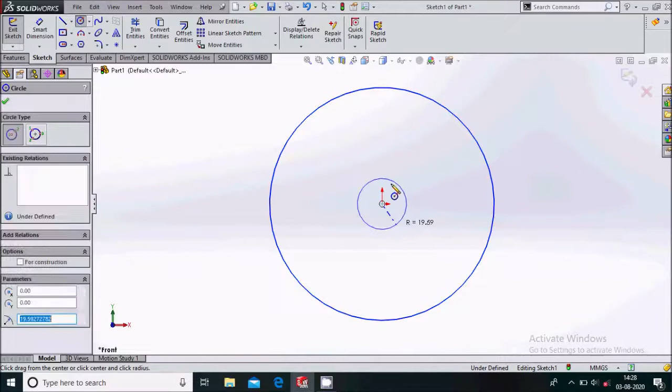So go to File, New, Part, OK. So here we'll first draw the bigger pulley. For that select the front plane, sketch on it, draw a center rectangle, draw a circle. OK. In this way we will smart dimension the circle to be 250 mm, this to be 50 mm, this to be 20 mm.

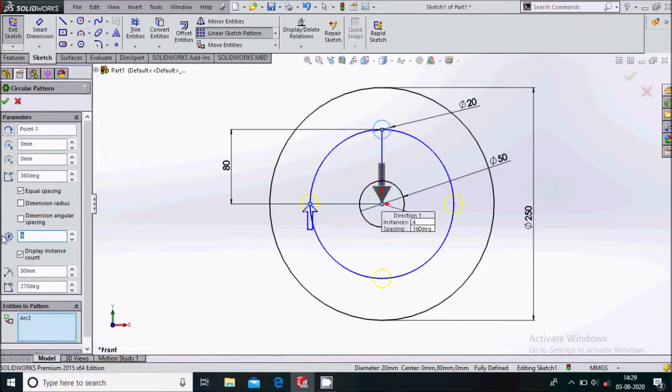We'll give the dimension distance between these. So the distance will be 80 mm. OK. Before selecting this circle, make these 2 points vertical. Now select the circle, go to the circular sketch pattern and we'll create 4 such circles. Now go to the feature Extruded Boss/Base. We'll extrude it by 50 mm. Say OK.

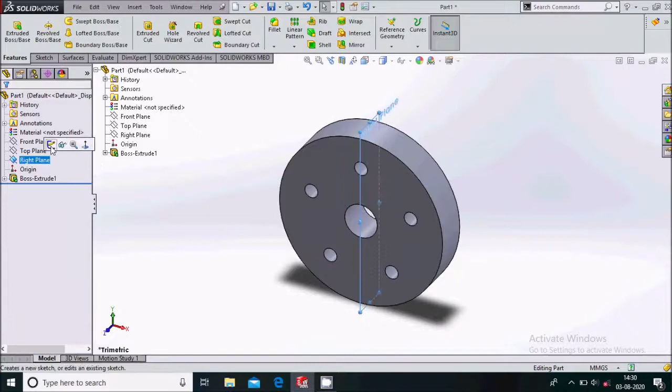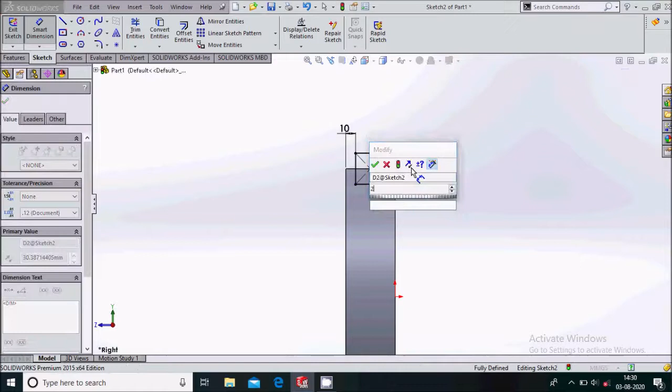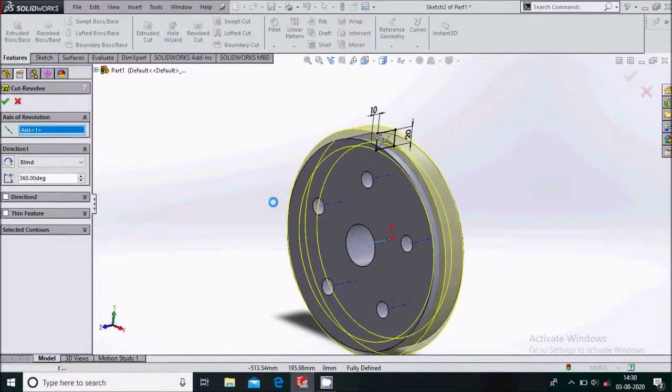Now here we'll select the right plane, sketch on it, make it normal to. We'll draw one center rectangle over here. We'll give the distance between this and this to be 10 mm. Then this total will be 20. OK. Now go to the revolve cut and here we'll simply click on axes. So you can see the axes are visible over here. Simply select the axis of revolution, this, and say OK. So the material will be removed about this. So simply hide this.

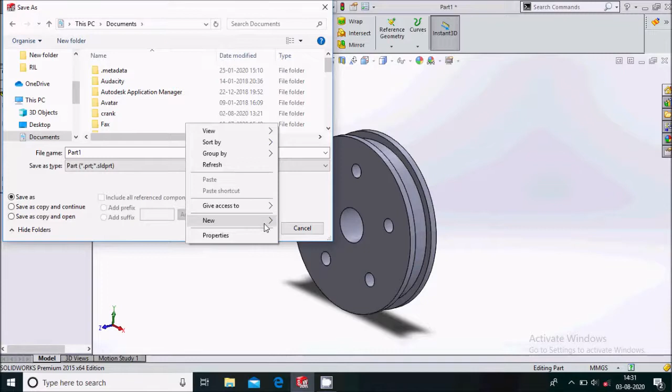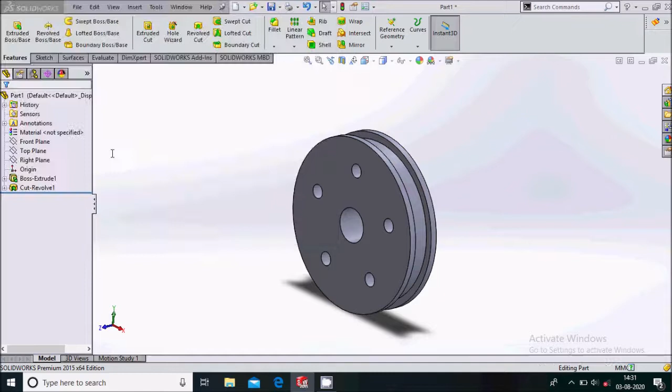Now Ctrl+S to save this in a new folder. We'll create a new folder, name it flat belt drive, simply open this and we'll name it as pulley 1. OK. So simply close this, go to File, New, Part, OK.

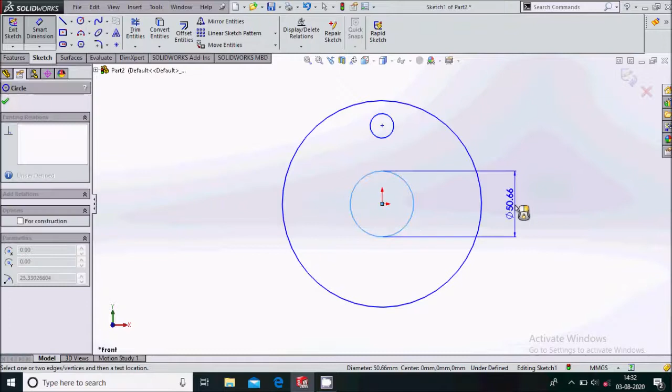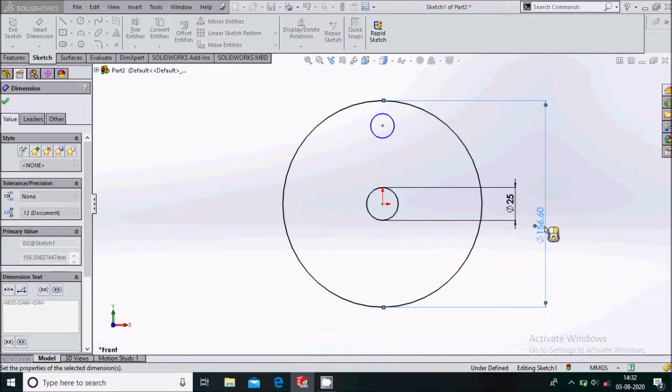We'll draw over here the smaller pulley. So front plane, sketch on this, draw the circles. Smart dimension them. We'll give the dimension for this to be 25 mm. We'll give dimension to this to be 125. We'll give the dimension to this to be 20 mm. And we'll define the distance between these to be 40 mm.

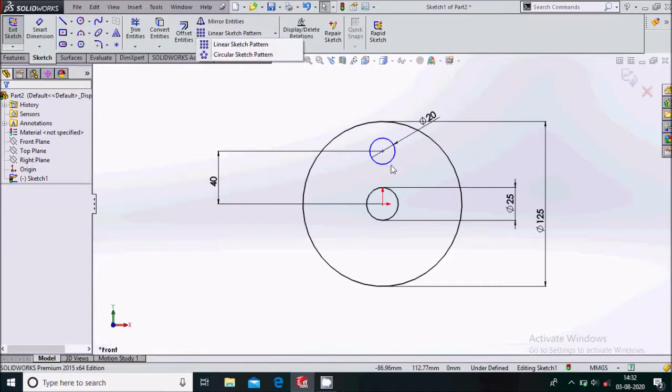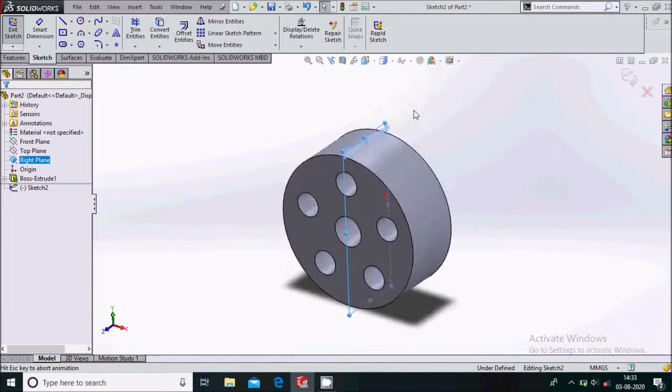Now we'll select this and use circular sketch pattern, we'll pattern 5 number, say OK, go to the feature Extruded Boss/Base, we'll extrude it again by 50 mm, say OK. Now we will select the right plane, sketch on this, make it normal. Again we will draw one center rectangle. Smart dimension this from here to here, 10 mm. This distance to be 20.

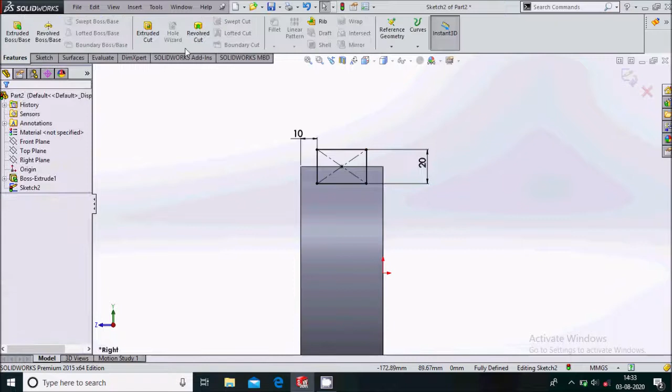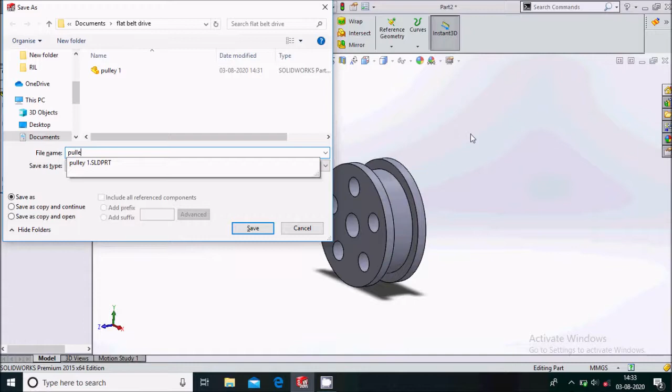OK. Go to feature, revolve cut. Again we will make the axis visible. Simply select the axis of revolution to be this one. So it will cut the material. I will hide this and save it with Ctrl+S as pulley 2. Now we will move on to the assembly of this.

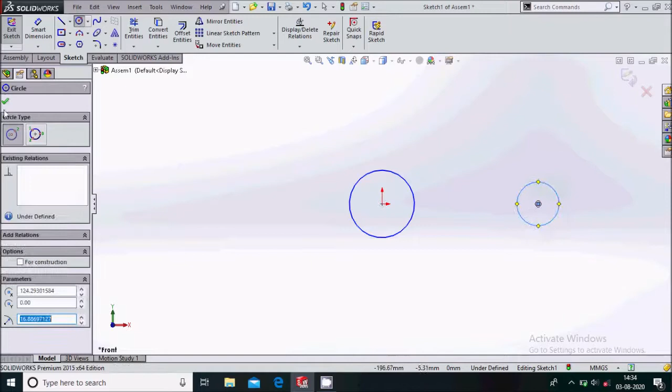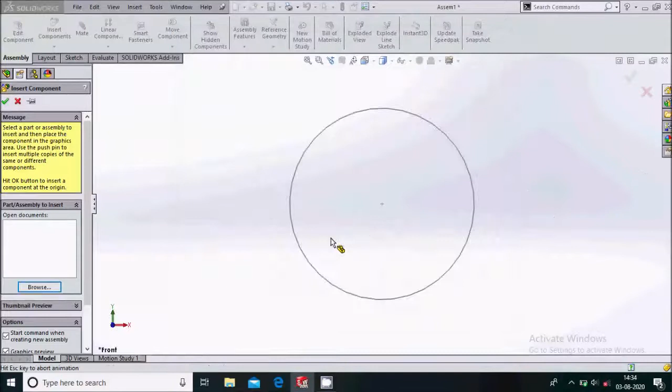So new assembly. OK. Cancel this begin assembly, select front plane, sketch on it, draw the 2 circles over here. And define the dimension between these to be 500. Simply exit the sketch. Now we'll go to insert component, browse. We'll insert these 2 pulleys, first and then second. Now this will be fixed, so right click, make it float.

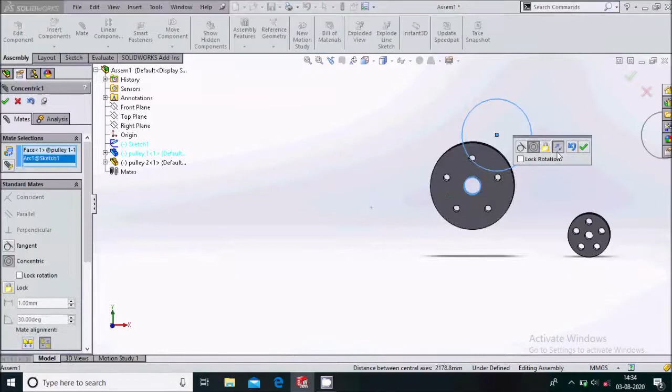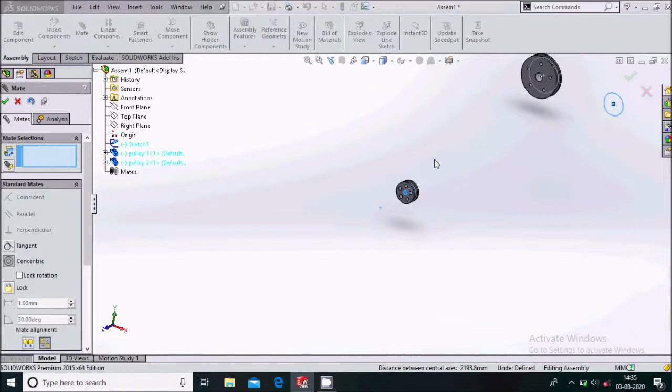Now we'll go to the mate, select this inside face and this circle, make a concentric relation. Now we will select the front plane and the back face of this, coincident mate. Again select the inside face of this and this circle, concentric mate. Select this face and this face, coincident mate. OK. Make it normal to. Now we'll just hide this one.

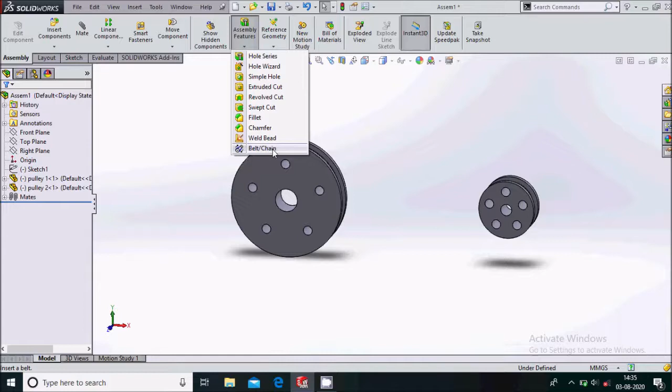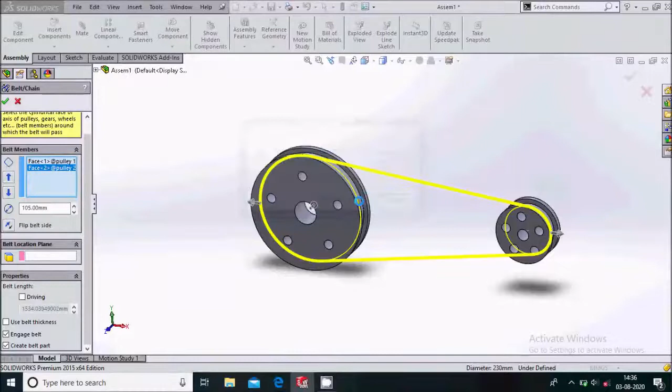So we'll go to the new feature in Assembly. Here in assembly feature you can find belt/chain. Select that belt/chain. Select the bigger pulley first, because this is the driver and this one will be the driven. Now go below and select create belt part and say OK. Save and continue. We'll save this as belt drive.

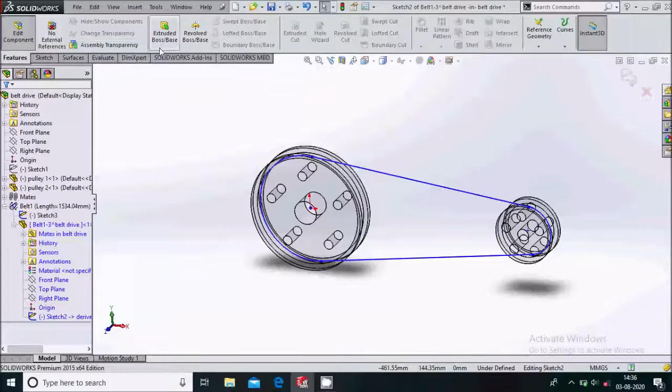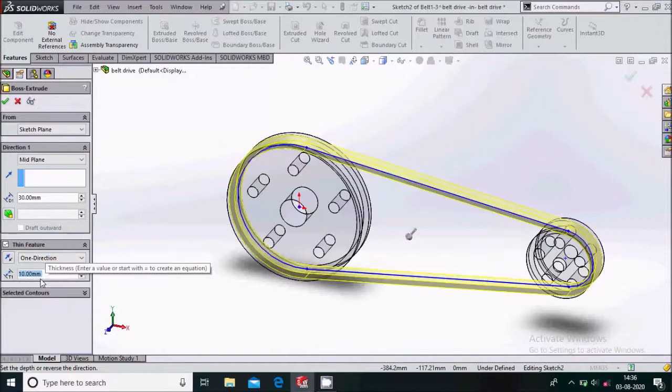Now we'll go to the belt part. Open this part and edit the sketch. Now go to the feature, Extruded Boss/Base. We'll extrude it through the mid plane, because this middle distance is 30 mm. So keep it 30 mm, and keep the thin feature, meaning thickness of belt, to be 10 mm. Say OK and exit. Now you can see a belt is created over the pulleys. Right click on this and hide it.

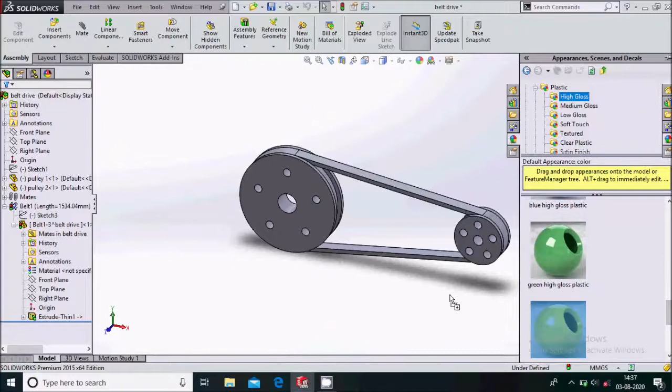Now we'll give some appearances to this. Go to appearances, plastic, high gloss. Select this and drag over the body. Again select this color, drag over the body. Again select the black color and drag over the belt body. OK.

Now we'll go to the motion study. Select motion study properties, keep the frame rate at 16 frames per second, say OK. Now we'll apply the motor to this inside face, keep it at 10 RPM, say OK. Now we will increase the play time to 8 seconds and click on calculate. It will take some time to calculate.

So this is basically an open flat belt drive. If you play this, both the pulleys will rotate in the same direction. So this is the design of an open flat belt drive.